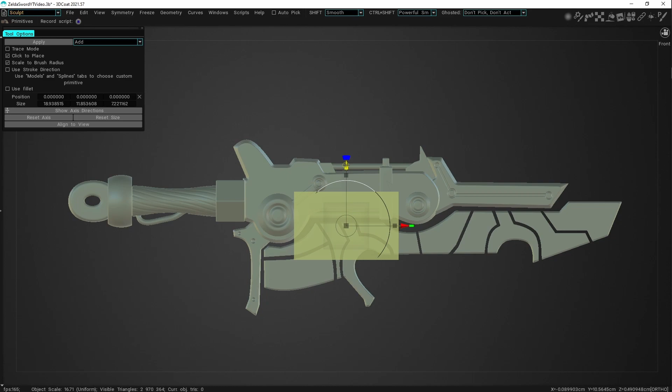All right, so let's just show y'all something simple. First, I just want to show you how easy it is to create shapes and really not have to think about topology, not have to think about how you're gonna manage edge loops and edge flow. I hate that shit, I'm not gonna lie to y'all, bro. I hate thinking about that shit. That's just not something I'm looking forward to doing. As an independent developer, I'm not looking forward to fucking topology and edge flow, bro. Fuck that shit, you know what I'm talking about. I know it's important, I'm not trying to down anybody whose life's work is edge flow and topology, but let's just be real: if you focus on that shit, you're not programming, you're not doing VFX, you're not doing a bunch of different things. You're just focused on that, because that shit is time consuming, bro. We can't be spending that amount of time creating assets.

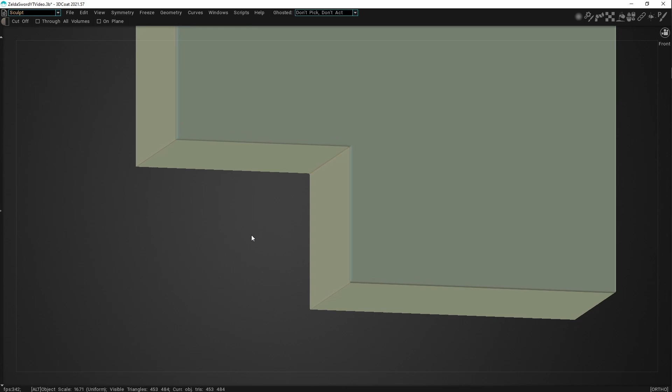So I'm gonna just create that little cube here, I'm gonna isolate it, and I just want to show y'all how easy it is to get shapes and get hard edge, nice, clean topology. So let me go into my cutoff tool. The cutoff tool is exactly what it says it is, it's a cutoff tool, you cut off pieces of geometry. This is very similar to what they're doing inside of Blender with Hard Ops and BoxCutter, but the difference is you do not have to be concerned about any type of topology. You don't have to be concerned about beveling edges or anything like that. You can set that all up to work out of the box how you want it to work.

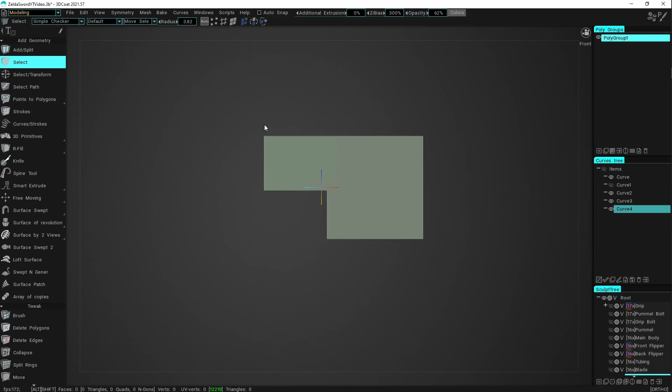Now don't get me wrong, I know some people don't want to be working with 450,000 polygons, I know some people's computers probably can't handle this shit. Sometimes my computer can't handle it. And for that, you still got the low poly modeling room where you can come in here and model traditional shapes. Like I could literally model this shape out of a traditional shape. Yeah, I could do that, but it's so much easier to create and so much faster to iterate to just go in here, use the cutoff tool inside the sculpt room and just create the shape you want to create as fast as you want to create it.

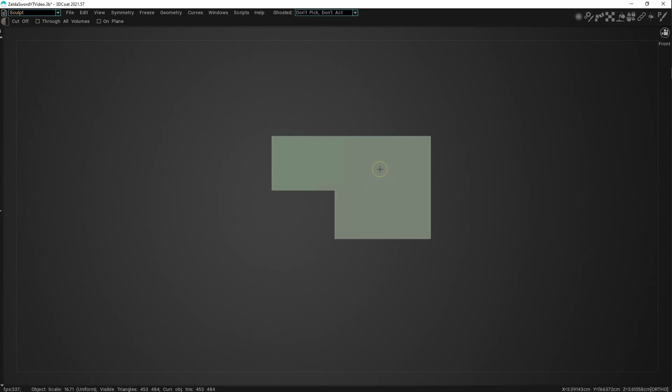You don't want to think about anything else. So I'm gonna just put a circle here. I don't know what I'm making here, I'm just cutting out some shapes. This is to show you guys the power of this program, how easy it is to get stuff going.

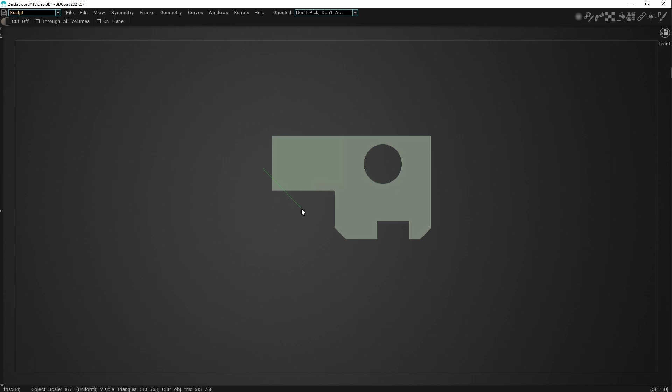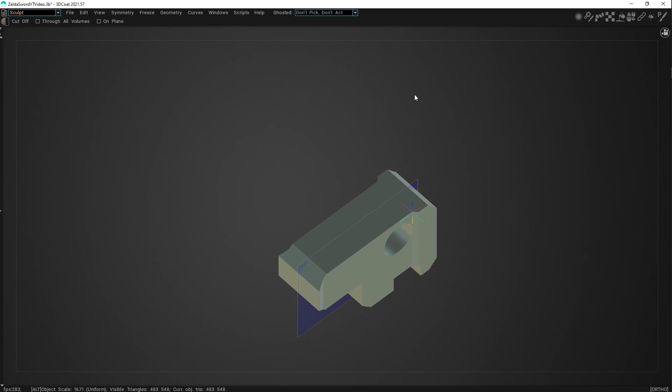So you see how easy it was to get a hard surface type of shape like this. Let me add some more flair here, let's add like a little cut like this. And something like this, let me turn on symmetry so I can get this on both sides. And here, so now we got this crazy weird shape.

If you tried to model this shape, yeah you can get it done, but you ain't gonna get it done in the amount of time I just spent. I know you're saying, well I can get it done and not have to worry about retopologizing. Well, same here, man. Same here, bro.

You can go to this retopology room, and we're gonna take this through the entire pipeline. We're gonna go from this shape block out to a retopologized mesh, to a UV unwrapped mesh, to a textured mesh, all in this video.

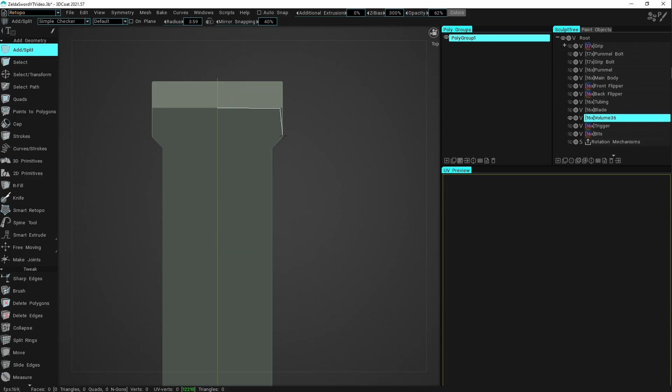So what I want to do is, one thing I could do is come in here, go to the top, and just start creating topology myself. You know what I'm saying? I could go in here and just start adding topology myself and work on it like that. I can even get this quads tool and really just come in here and grab out quads.

And really retopologize this whole asset really quickly. I'm being more precise than I need to be here because I want to show you guys that these retopology tools are nuts. Like, they're absolutely nuts what you can do. I just literally damn near retopologized the whole mesh here, and it didn't take me any time.

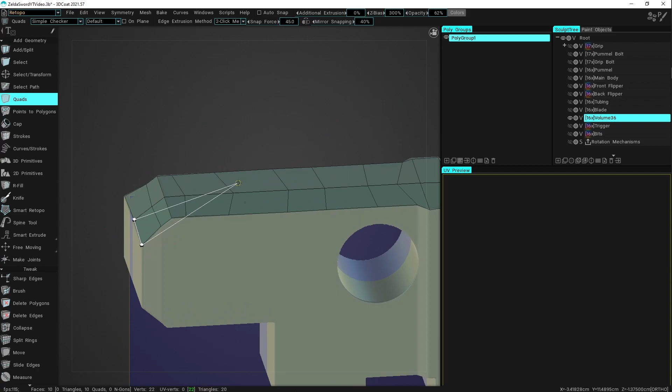I could do that retopology, and I wouldn't mind. The thing about me is I'd rather get my shapes first, and then worry about edge flow afterwards. I don't want to have to think about that edge flow stuff in the beginning when I'm barely getting the asset created.

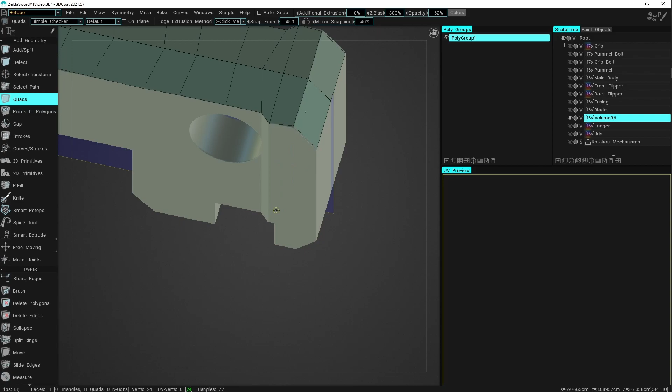But you can see how easy it is to retopologize something like this. I could go and retopologize this all the way through to get the best topology possible, get the lowest poly count. But what I want to show you guys is the speed of this.

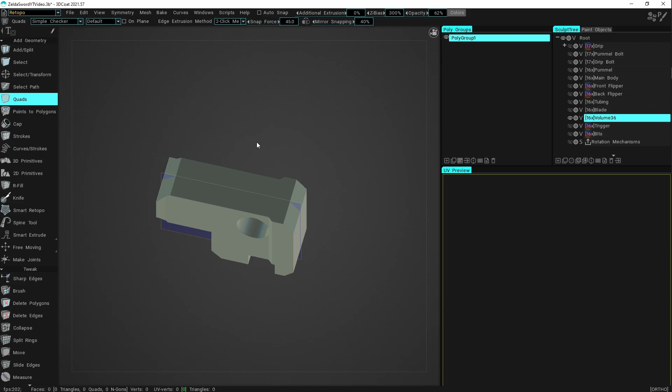So let me clear this poly group out, and that'll get rid of the topology I created. I'm also going to turn off symmetry here so we don't get any bugs. And I'm going to right click on this mesh, this volume, and go to Autopo. We're going to give it, let's say, 8,000 polygons. Let's see if it can handle all of these different shapes with 8,000 polygons. I'm gonna hit OK.

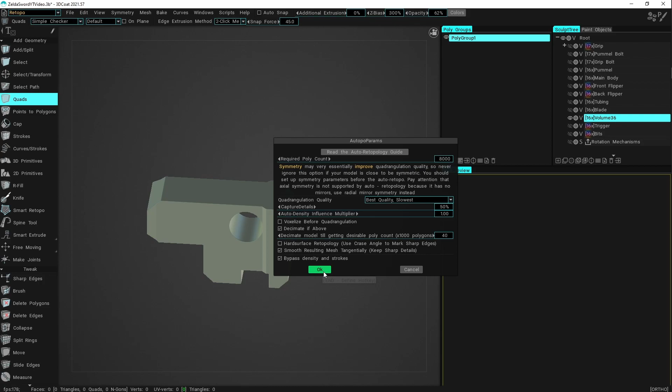It's gonna blaze through, it's gonna decimate the mesh, and then it's going to calculate how it's going to get all of these details added to this mesh. So you can see how convenient something like this would be.

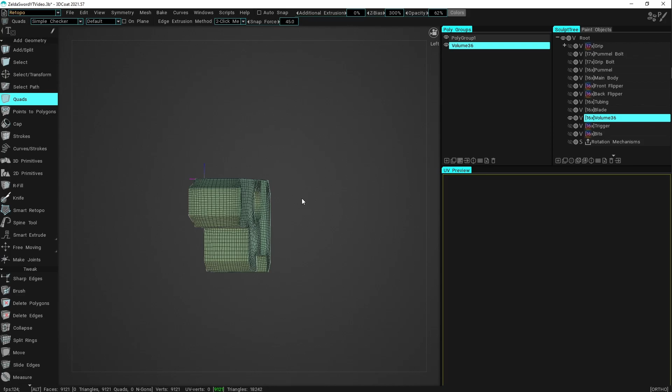And this is probably one of the best quad remeshers I have ever used. I paid $100 for Exoside quad remesher, and it has never given me topology that looks this clean. So right now, yeah, I got 9,000 quads, and of course the triangle count will be different, because triangles are twice as much as quads, since you cut the quads in half to get triangles.

So yeah, 9,000 quads. This is not bad topology here, but it doesn't stop there.

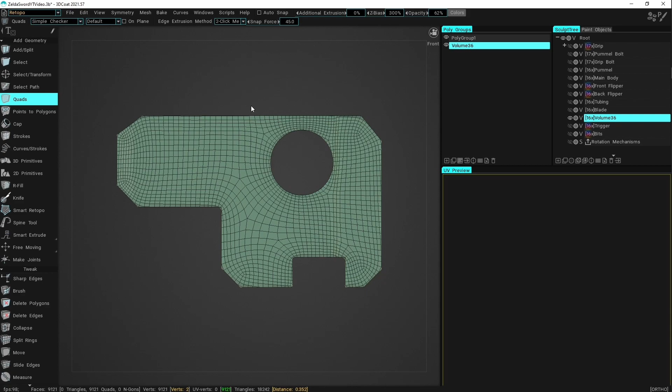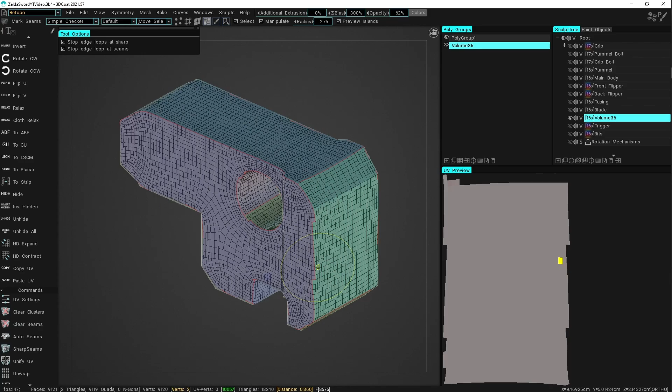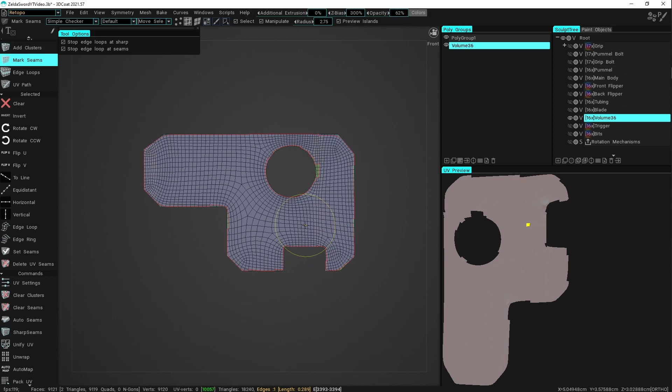I can even tell this to mark some seams for me. Let me find where my mesh went. Let's go ahead and say auto seams, and you see it added some seams for me. It could be a lot better, but what it did was find the edge loops that are non-stopping. I could go in here and add my own seams if I wanted to, but since I just want to show you guys the speed, we're going to bypass that and do auto seams for now. But just know you could go in here and unwrap your mesh perfectly, clicking each edge you want to be a seam, and it'll unwrap perfectly. So let me let this auto map for itself.

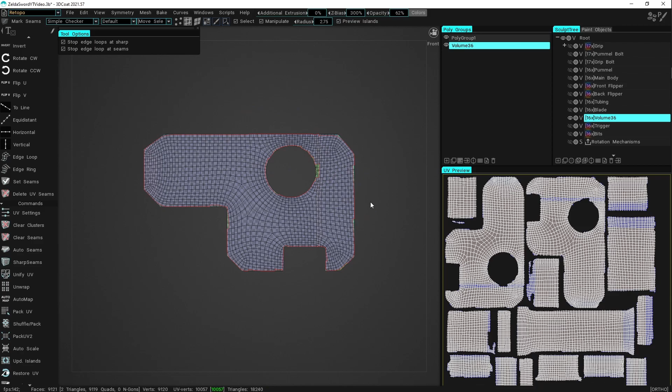You see it lays out my UV maps very nicely. You also have a second auto map option where it auto maps for you, but it doesn't rotate for you. So let me pack this UV — packing it basically makes it more ergonomic for the space. So it doesn't stop there.

You can go ahead and bake in normal map details, but since I don't have any details, it would be kind of weird to bake a normal map. So let me go back to my sculpt mesh and add some details here.

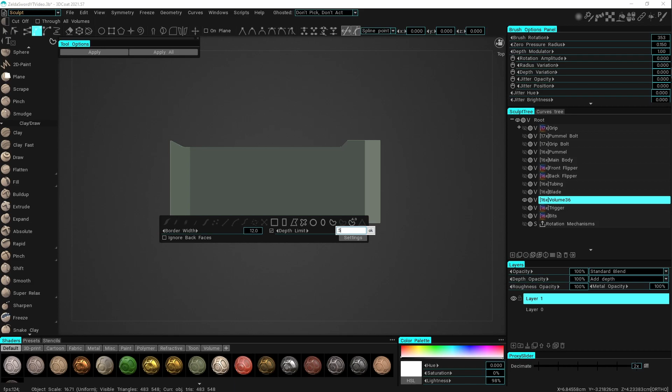Let me set my depth limit, and let's say I want to go like 0.5 to add some nice little normal cut details. I'm going to use my rectangular marquee selection and cut in some — oh, that's too deep, so maybe 0.25. I'm going to cut in some nice little normal details there.

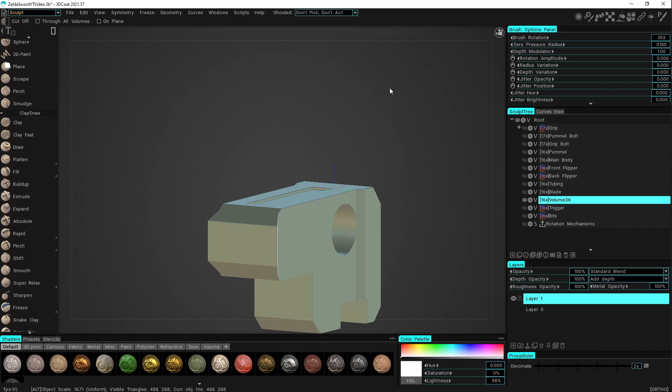And see if they bake good into the normal map. Maybe make a little decal there, and put one opposite on this side since we don't have mirroring on.

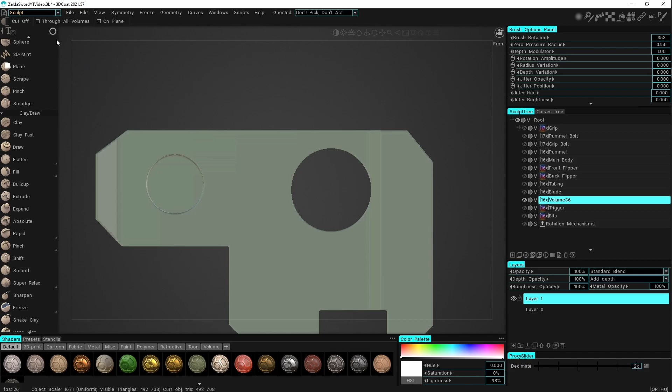And I'm going to go back to my retopology room. Now you can see those details are there, and I could even move my vertices to kind of snap to those.

But since we're fine on that, we can go ahead and bake this mesh here. You can also adjust the size of your cage if you wanted to. Right now I'm not going to be too focused on that because that's something I'd put into an actual tutorial. But basically, this is going to bake that high poly detail onto this low poly mesh.

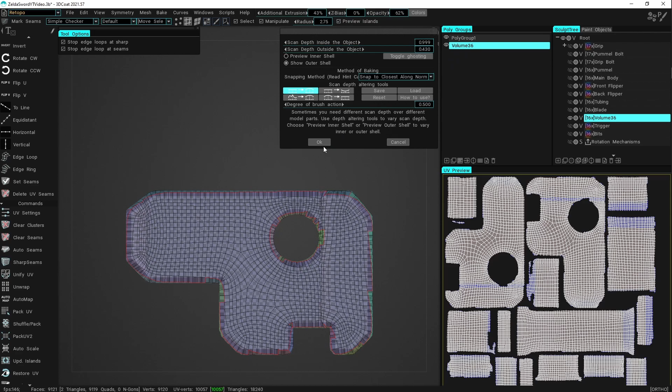If I press OK, it'll let me pick my settings. I can set it up to have my normal map configured for any type of software out there. You can even add your own preset, and you have all these settings. You can weld vertices if you wanted to, but these default settings usually get you a decent bake.

So I'm going to do a 4096 for a 4K map, and it's going to do some thinking, and then it's just going to blaze through baking out that normal data.

This is one of the things — say you were in the prototype phase and wanted to knock out a few assets in a day and test them out in the game. Like if you were making weapons and want to test how they look in the game and in the player's hands, and get a decent feel before putting 8 to 24 hours of work into an object, you can really just bang it out quick in here, get a quick retopo, get a quick bake, and then go over to the texture room.

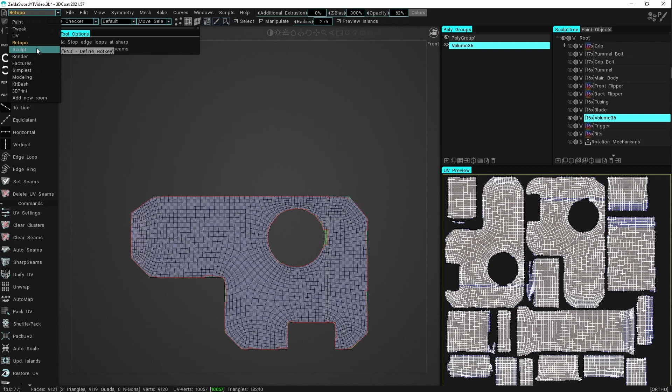Let me make sure that my low poly is the only thing showing here. So yeah, I'm only showing my low poly. Double check that — yeah, so now you see we got our low poly mesh.

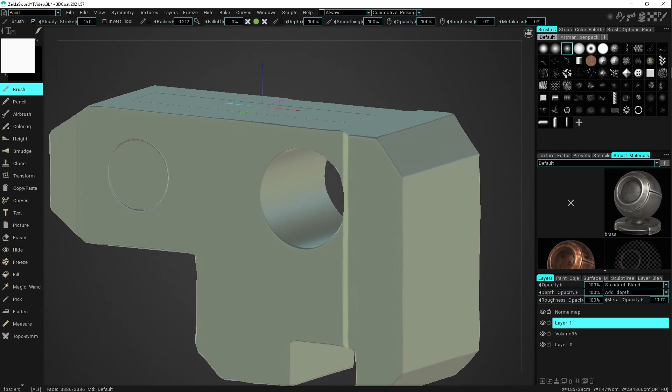You can see our normals are kind of weird here, but the thing about this program is that you get the normal map as a paintable map.

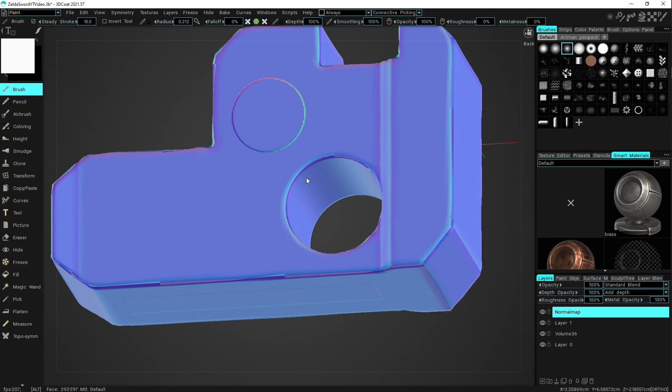So if I wanted to, I could go in here and unlock this map. And then you can set this to a standard texture so you can see it on the mesh. You can go in here and actually paint in normal details, fixing your normal map by hand painting it. There is no other program that offers that kind of control over the normal map.

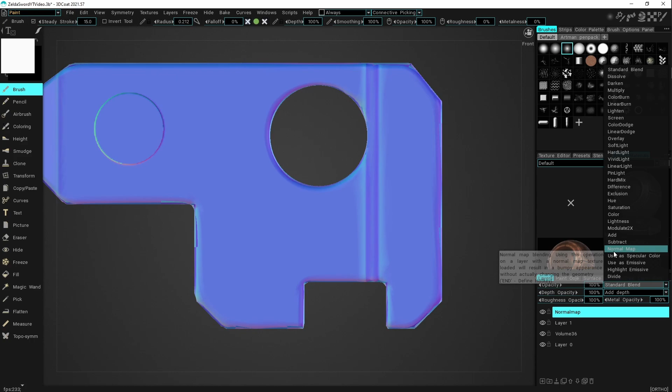And that is one thing that is very powerful about this program. And it doesn't stop at the normal map. If I were to bake out an ambient occlusion map, I could go in and hand paint the ambient occlusion map. It just is a really powerful program through and through.

So I'm gonna set this back to normal map, and then I'm just going to add a brass texture on here. If I double click on here, it'll tell me that I need to bake out my curvature and stuff like that, so I'll go ahead and do that.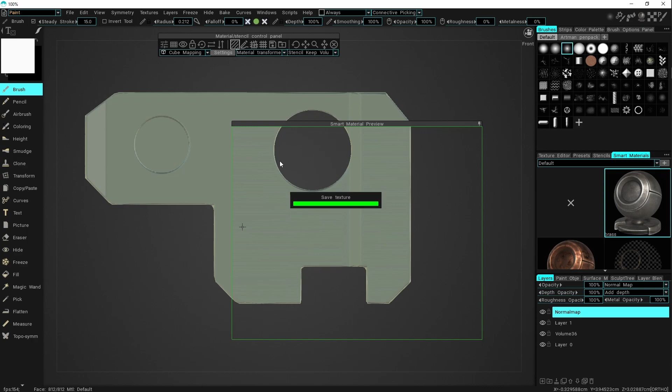And this also has a great curvature baking system. It also bakes out great ambient occlusion. As I said before, if you get any defects in any other program, fixing those defects will take tweaking and twiddling of the thumbs. But in this program, if you get ambient occlusion defects, you can just paint your ambient occlusion layer and fix those defects yourself.

So let me go here, and this is the texture that I want to use here. You can see there it is, coming in. I can also just increase the resolution by zooming in on the texture just to get more quality out of it. So let's go all the way, maybe there.

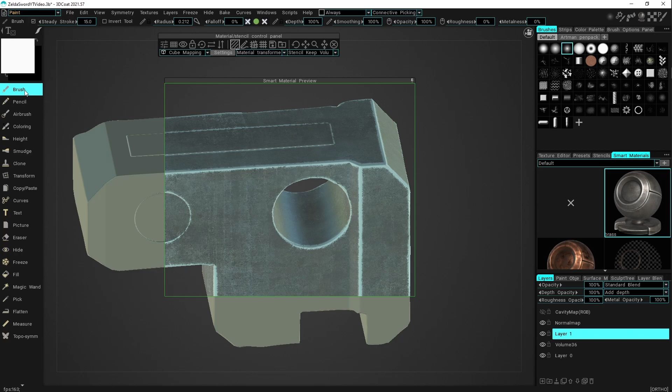And you see, you really got a lot of control in a program like this. So I'm gonna go ahead, and you can do one of two things. You can literally come in here and hand paint this texture on there, or you can just fill this whole object with that material that you just set up.

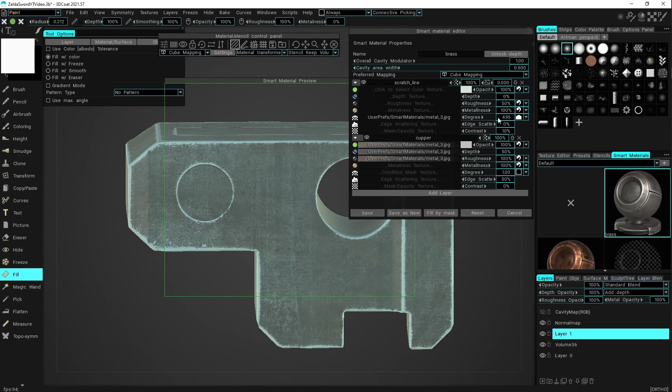And all of these materials are editable. You can go into the material itself and change parameters. I know this UI isn't as pleasing as Substance Painter, but it is very clear to understand. So I will say that.

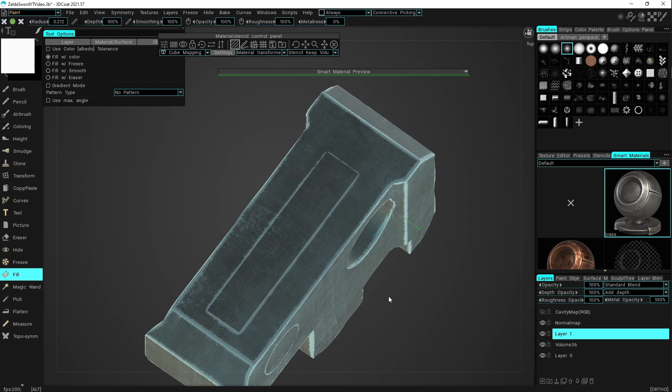So it doesn't stop there though, people. So I'm gonna get rid of this, and you see we got this object. It's a real nice hard surface object. We do have some little normal defects, but when the texture is on there, you can't really tell that this mesh has really too many defects, except maybe right here in this area where my mouse cursor is. But we can go ahead and check out what a render would look like.

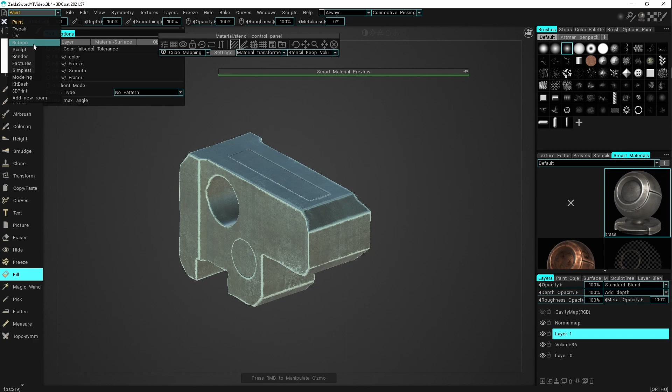And you can see, personally I'm using Marmoset Toolbag renderer, but I can also go to UE4 to see what it would look like in UE4's lighting setup. I can go to the render room here, let me go back to the sculpt room, and let me hide my high topology mesh here.

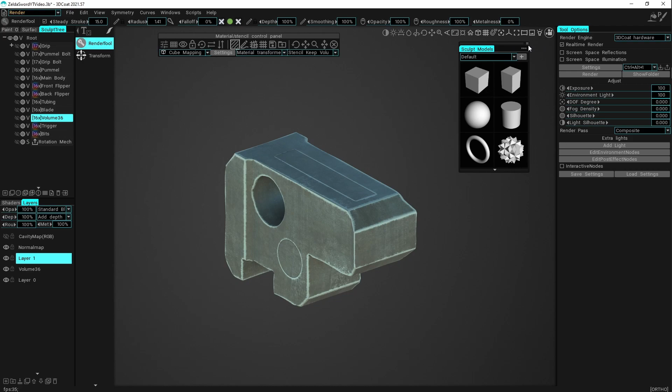I probably should go to my render room and add the window for my sculpt tree. Where is it? My sculpt models. No, not that, sculpt tree. So if I open up a sculpt tree, I could go ahead and, oh, it's already over there. Okay, cool, so let me close this. I don't need this, I could hide this over here. I don't have to go back and forth.

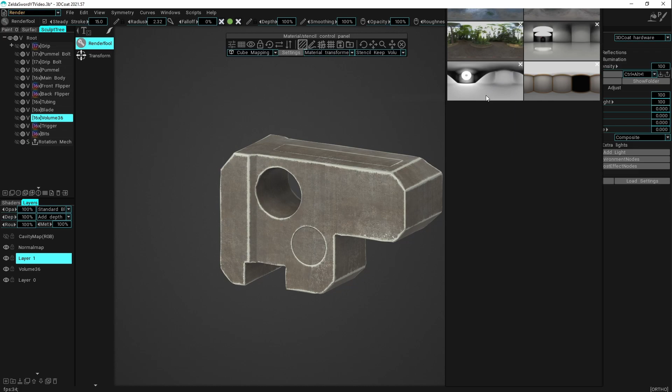But you see here, we get this nice little render here. It is rendering in real time. So I'm gonna turn on screen space reflections and screen space illumination. I can also go in here and change the actual environment map that I'm using to give me a better lighting that I want. You can add more lights, you can change all types of settings about this render here. But I'm gonna render just this out real quick and save it to my desktop and replace that.

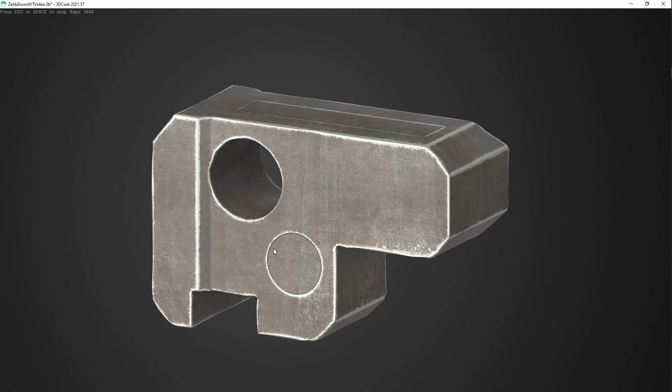It is a ray trace renderer. It is pretty fast, I'm not gonna lie to you, and it does get pretty good results for it all being tied into this one program.

Now I know more people will be like, Eevee is way better than that, it's probably way faster, and that is probably true. But the thing is, I don't have to go out to Eevee to get a render similar to this one here. You know what I mean? This is a pretty good representation of what my mesh is going through, what my mesh has on it.

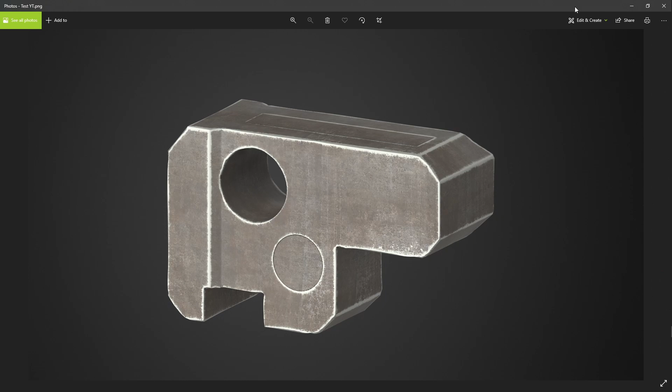I really can't explain enough how powerful this program is. I really wish that people would talk about it more, so that it can get more press, because the thing about all these other programs is that people talk about them a lot. So when you see the questions in different groups and forums of, I'm a beginner, what program should I learn how to use? There's always people saying Blender, there's always people saying ZBrush, there's always people saying Maya or Max.

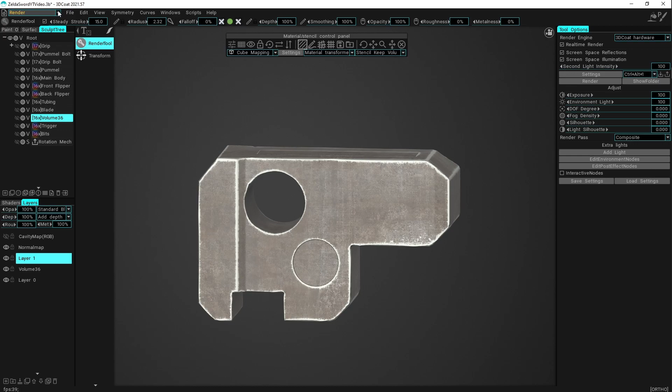I am one of those people that's like, man, you should test out Houdini. And now one of the programs I will mention to other people is 3D Coat, man, because you really can't get stronger than this. If it just goes to say, like, if I wanted to add this object to this object, now I just added a variation really quickly.

So if I want to create a base weapon and then save that as my base weapon, and then come in here and change out the parts to do different things, to look different, then I could easily create those shapes and see how they're going to fit. I don't have to put in all the topology work first and then see how it's going to look in sub D mode, and then go to ZBrush and paint the high poly details and things like that. You can do all that here in this one program.

So, man, I really hope that you guys can understand how powerful I think this program is. I know that sometimes these arguments end with, well, Blender is free. Well, what about Blender? Or what about this or that? But I'm not talking about Blender, I'm not talking about price right now. This program is free to learn.

You are free to download it right now and test out its features and just play around with it. Do like I did. For the first week, I didn't pay a single dime. I used a free trial. I was exporting out meshes to see how they did in other programs. I was testing out how to do things as fast as possible. And I really fell in love with it. I ended up buying it because I want this in my pipeline. I want to be able to make commercial assets with this very quickly, I might add.